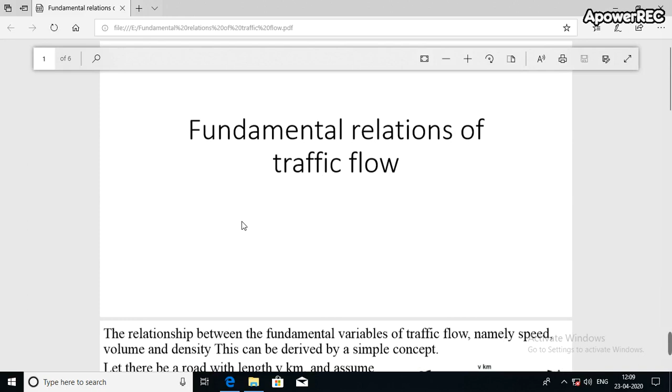In our previous class, we talked about the fundamental macroscopic parameters: speed, flow, and density. Today, we shall be discussing their interrelationship.

Now, in this particular figure, you can see that between the 2 points A and B, which are v kilometer apart, the number of vehicles is N1. Now, the number of vehicles present in a section in an hour is your flow. So, Q equals N1.

Similarly, density is the number of vehicles present in unit distance. Here the distance is mentioned as small v. If you multiply the density with the distance, you will get the number of vehicles. Now, suppose one vehicle is moving from point A to point B in the given picture, which is v kilometer apart, and it takes 1 hour to reach from A to B. That means the speed of the vehicle is small v.

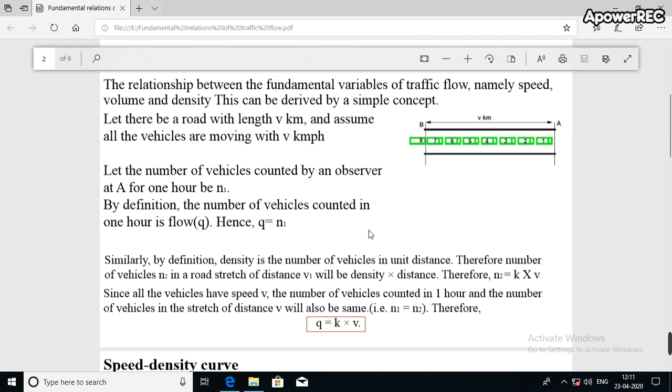Now, here N2 is the number of vehicles, N1 is the number of vehicles. As they are both the number of vehicles in a v distance, we can easily get that N1 equals N2, which means Q equals K into V. That means flow equals density into speed. With this relationship, we'll be talking about the different interrelationships.

Let us start with the speed density curve. We can see that the line shown in red is the assumed line. Obviously, you can get different kinds of lines depending upon the parameters given, but they will be discussed later. Let us first talk about the straight line in red. In this particular flow, we can easily get the speed and density.

Here, it is the maximum value of the speed. In the y-axis speed has been taken, and it is the maximum value of the speed, but the density is 0 in that case. This speed is known as the free flow speed. Whenever someone is moving in the traffic stream and no vehicle other than that vehicle is present, he can move with his desired speed. That is known as the free flow speed.

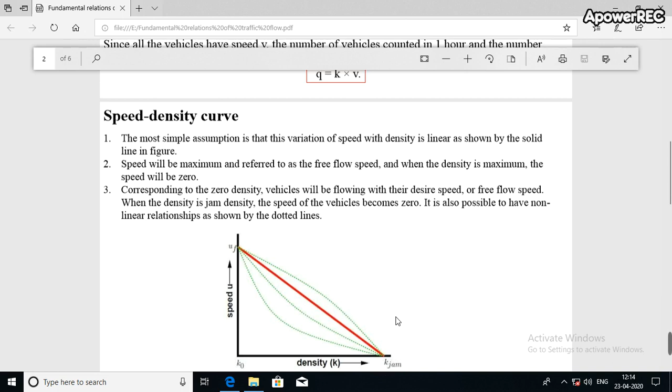Let us move to the next relationship, flow density. Here you can see that this is a parabolic relationship. The flow has zero value at two different conditions, at point O and at point C. When the free flow speed in the previous picture occurred, there were no vehicles present in the traffic stream, and the driver is moving with his desired speed. That means at that condition, flow and density both will be zero.

Now, as the number of vehicles increases, which signifies the increase in flow as well as the increase in density, up to a certain point this increase in both will take place. That point is shown here as B in the graph.

This particular point B signifies the maximum flow condition, here Qmax, and maximum density condition, that is Kmax. No, it is not jam density, it is maximum density. But beyond that, if the density increases in this way, the flow value will decrease. That means the number of vehicles present in that area will increase.

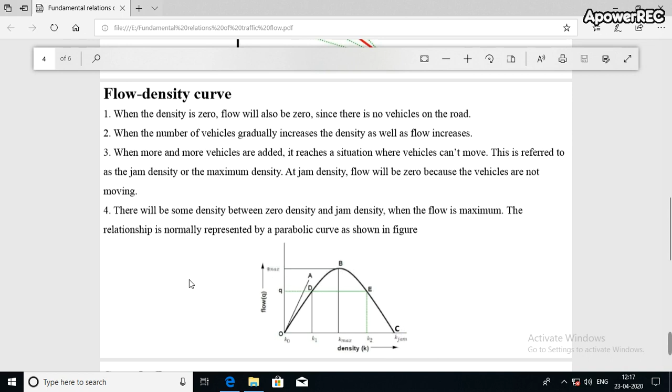Now let us move to the third type of relationship, between speed and flow. Here you can see that at the first place, this Uf, which is the free flow speed, and at that point the flow is zero. Similarly, as the flow is increasing, the speed will decrease because the driver will need to maneuver. Maneuver means to move in a zigzag way in order to make space. Up to a certain point, the speed decrease will happen and it will be Qmax.

Beyond that, if the flow tries to increase, the speed will decrease, and as a result, the vehicles will not be able to move. This Qmax condition corresponds to the Kmax condition, that is the maximum density. Beyond that, if they even try to move, they will not be able to move freely. So as a result, the vehicle count will decrease. That means the flow will decrease, and as a result, the speed will also decrease.

So up to a certain point, again they will reach the zero value where the jamming condition occurs. No vehicles will be able to move. As a result, the speed will be zero, as well as the vehicle count will also be zero, because the vehicle count in an area per hour is the number of vehicles passing, not the number of vehicles present. If the number of vehicles present we take, that will be density, but number of vehicles passing will be the

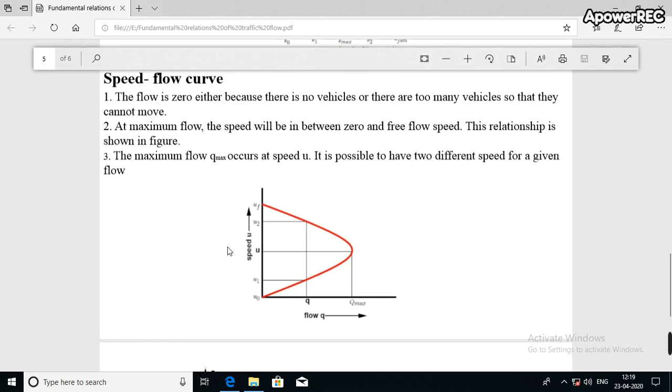flow. So in case of the jamming condition, no vehicles are able to move. So that means the number of vehicles passing will be zero. So in this way, these three parameters are interrelated. And I have shown one combined picture where these three interrelationships are given. You can see in case of this particular figure,

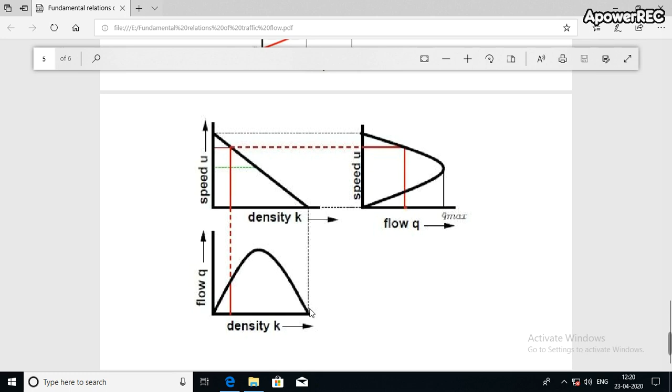But for a particular flow value, we can have two different speeds, as well as for a particular flow value, we can have two different values of density. One is trying to approach towards the maximum density, and one is trying to approach towards the jamming density. So this particular combined diagram is very useful for queuing theory. Obviously, that is not included in your syllabus, so you do not need to bother about that.

But just try to remember one particular flow value can have two different values of speed as well as two different values of density. So this is it for today.